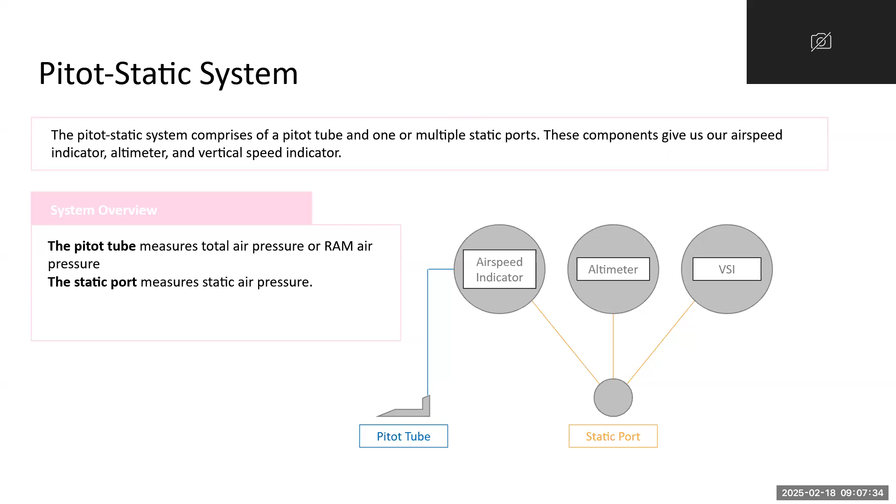Okay, cool, we'll do this after. So the pitot tube also, I forgot to mention, has a drain hole. And this just allows for air to, because it's essentially one hole, the air goes through the pitot tube and out the drain hole. Does that make sense to everybody?

Okay, cool. So the pitot tube is only connected to the airspeed indicator, but the static port is connected to all three instruments. All right, any questions so far? Everybody with me?

Cool. So the first instrument we're going to be talking about is the airspeed indicator. So like we talked about, the airspeed indicator takes information from our pitot tube and our static port. Inside the airspeed indicator, we have what's called a diaphragm.

This diaphragm, think of it like your stomach: when you breathe in air, it expands, and when you exhale, it contracts. Same thing here. The pitot tube fills the diaphragm with ram air pressure, and the static port fills the surrounding case with static air pressure. As you increase and decrease in airspeed, this diaphragm expands and contracts based on that differential pressure to give the airspeed indication.

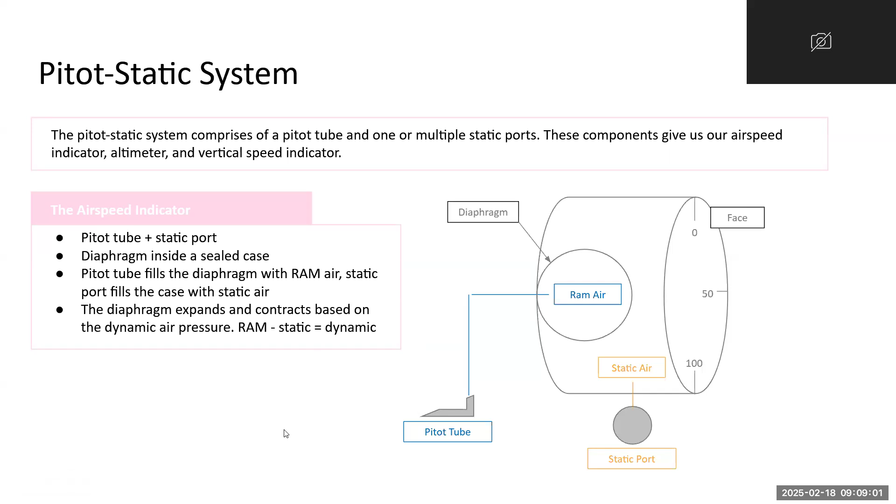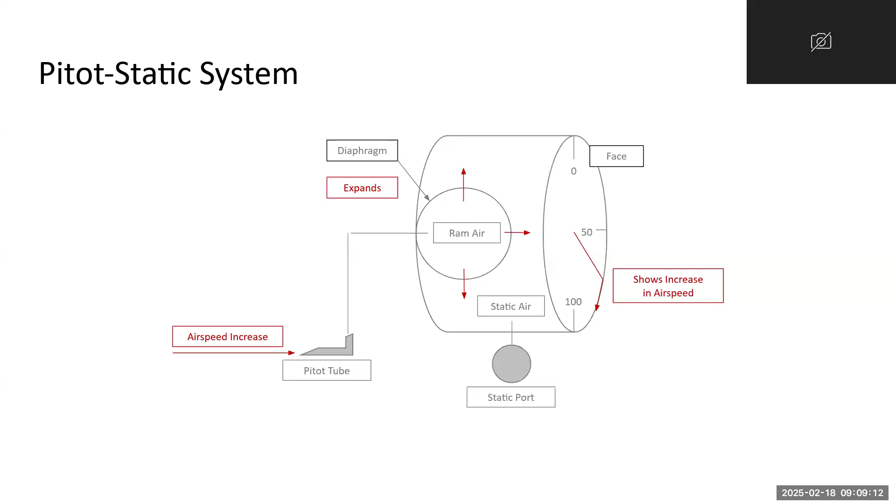So as you increase in airspeed, that diaphragm is going to expand to show an increase in airspeed on the indicator. And as you decrease in airspeed, the diaphragm is going to contract and show a decrease in airspeed indication.

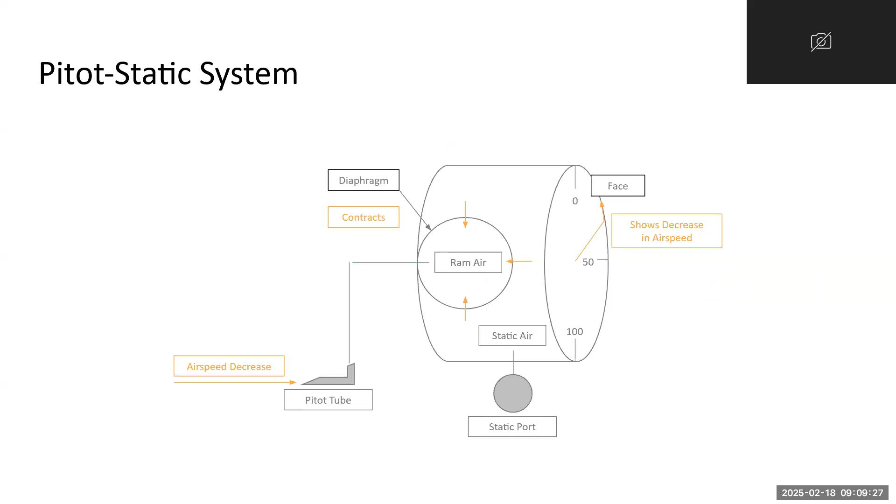Is that making sense so far, everybody? Okay, cool. We're not gonna go over that.

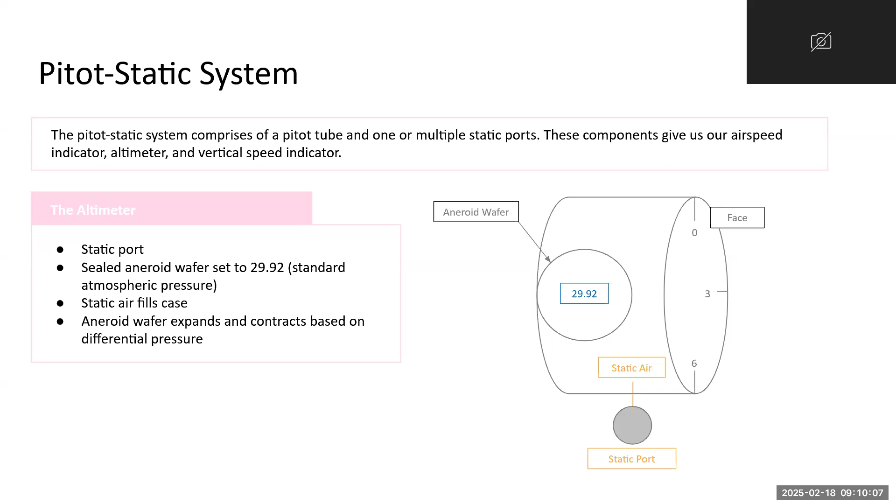So the altimeter works similarly to the airspeed indicator, but it only takes information from the static port. It has what's called a sealed aneroid wafer, which is similar to a diaphragm, but the pressure inside the aneroid wafer remains the same at 29.92. So essentially, we have the sealed aneroid wafer set to 29.92, and then the case fills with static air pressure. Same thing with the diaphragm: the aneroid wafer expands and contracts based on that differential pressure to give an altimeter reading.

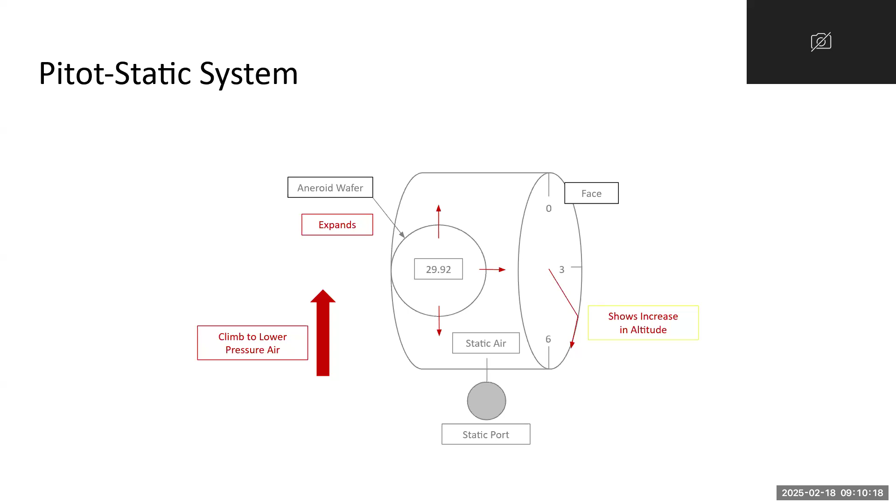When you climb to that lower pressure air, like we talked about earlier, that aneroid wafer expands to show an increase in altitude. And when you descend to that higher pressure air, that aneroid wafer contracts to show a decrease in altitude.

And finally, we have our vertical speed indicator. Our VSI only takes information from the static port. It has a diaphragm inside of a case, like the airspeed indicator. The static port is connected to both the diaphragm and the case, but the static air enters the case through a calibrated leak, meaning only a certain amount of air is let in at one time. So the pressure changes instantly inside of the diaphragm, but slowly inside of the case.

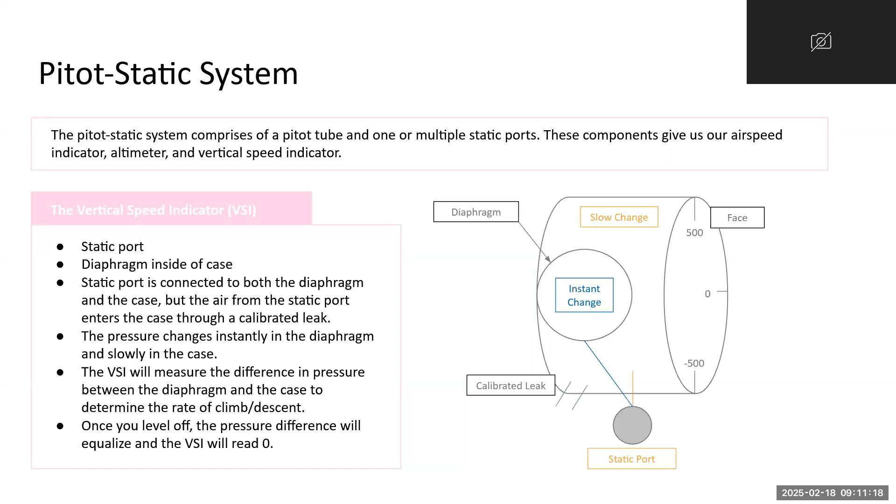Does that make sense, everybody? Okay, cool. So the VSI essentially compares the pressure inside the diaphragm that instantly changed to the pressure inside of the case that slowly changed to give that vertical speed indication.

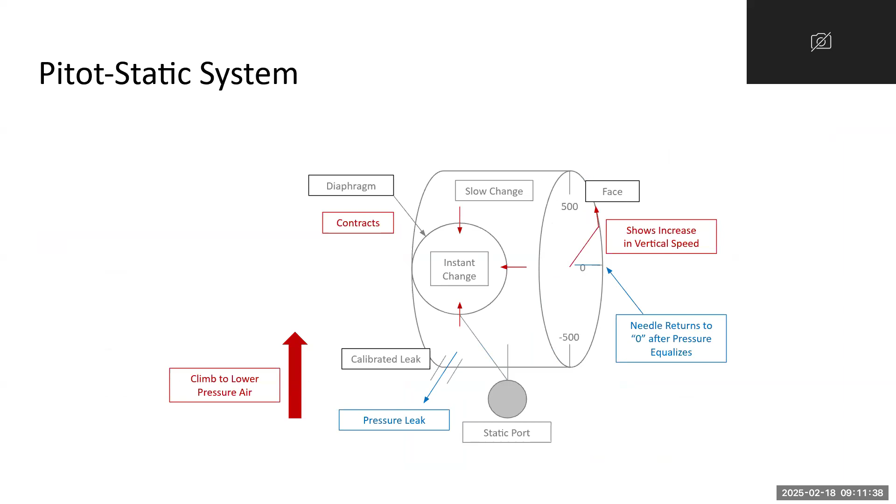As you climb to that lower pressure air, there's that instant change, which causes that contraction in the diaphragm to show an increase in vertical speed. Once the pressures equalize between the two, meaning that you're leveled off, it'll show a 0 on the vertical speed indicator. Same thing as you descend to that higher pressure air: that diaphragm will expand, showing a decrease in vertical speed or a descent, and then eventually it'll level off at 0 once you have leveled off.

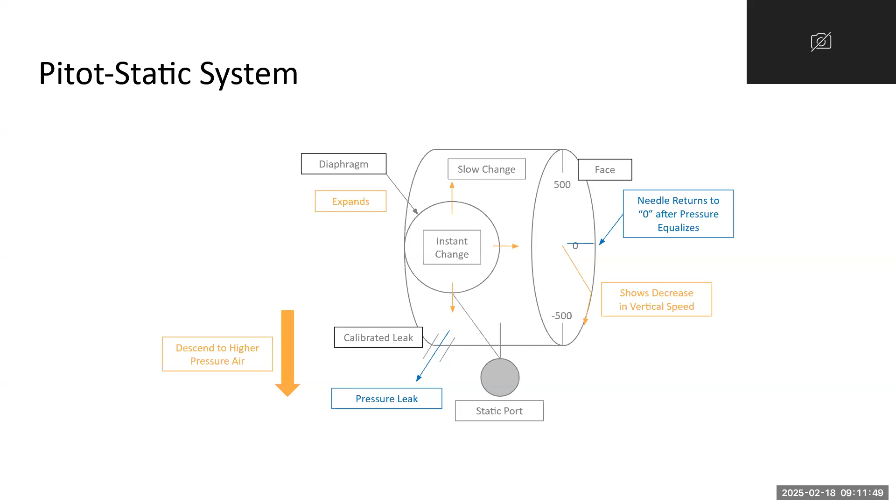Cool. Any questions on that so far? Okay, cool. So like we talked about, it's really important to understand what's going to happen if any of your systems fail in instrument, because you are only flying by your instruments, not looking outside.

So there are a few ways this can happen. When you are flying in instrument conditions, you are susceptible to icing, so this pitot tube can get clogged by icing. It can also get clogged by other things, like if a bug flies into it, or some dust clogged in there. And the static port can get blocked by other ways as well. But if the pitot tube is blocked or not working, what instrument's going to be affected? And if the static port is blocked, what's going to be affected?

Yes, exactly. Wow, you guys are a great class. That was not sarcastic, I was being for real. I think you were sarcastic. No, I was being great. You guys already know what you're talking about. Yeah, no, you guys are great. You guys are so excited. No, you guys just kind of have low energy today. I need you to match my level. Yeah. Yeah, okay, cool.

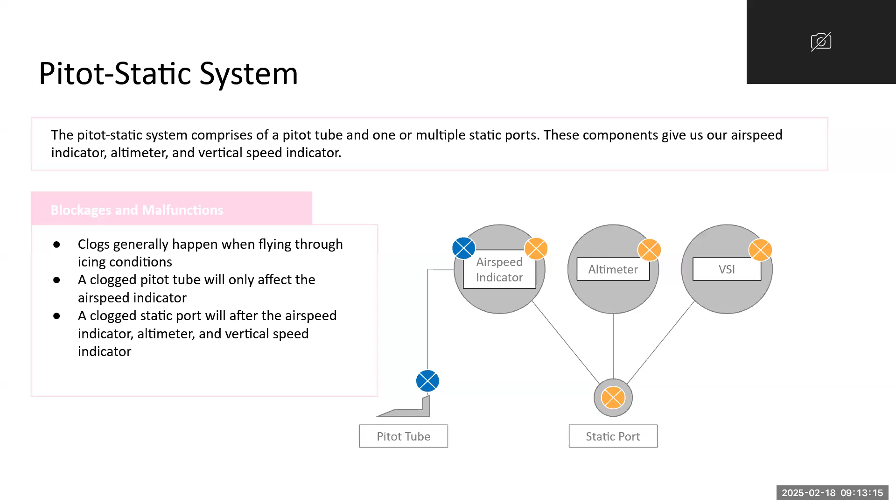So a blocked, wait. I thought a different slide, that's fine.

All right, so a blocked pitot tube, like we talked about, is only going to affect the airspeed indicator. What do we think is going to happen when the pitot tube is blocked? This means we're not getting any ram air pressure, so what's going to happen inside the instrument? It's gonna act as a... exactly, anybody know why? Because it only has static. Yes, only static air, exactly. So we're gonna have no new ram air pressure in here, only new static air pressure.

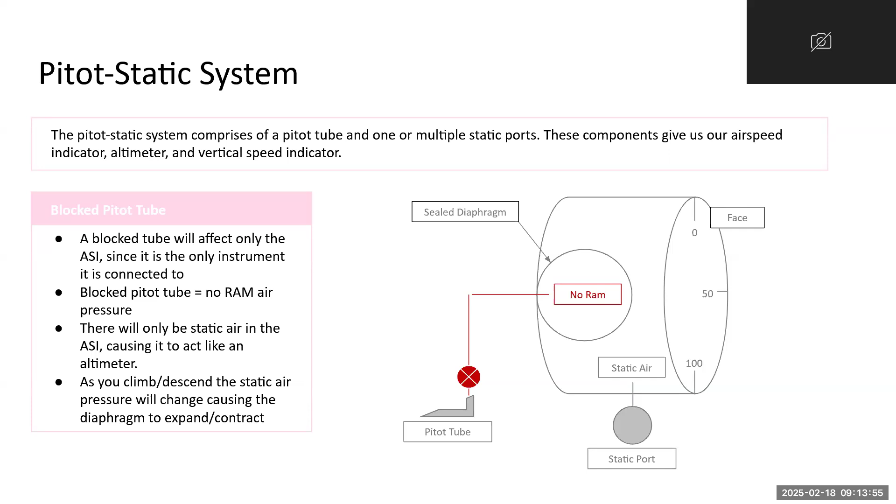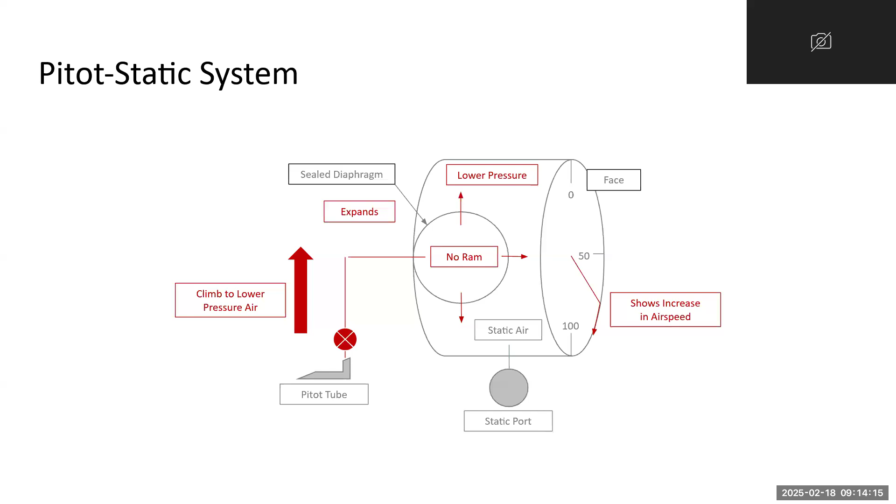So as you climb to lower pressure air, because there's no change in ram air pressure, the diaphragm is expanding and contracting incorrectly. As you increase in airspeed and climb to lower pressure air, it's gonna show that increase in airspeed. As you descend to higher pressure air, it's going to show a decrease in airspeed. So it's just going to act like an altimeter.

If the static port is blocked, what do you guys think is going to happen to the airspeed indicator? It works, but it reads inaccurately, basically completely inaccurate, because we're not getting any static pressure change. You're trapped.

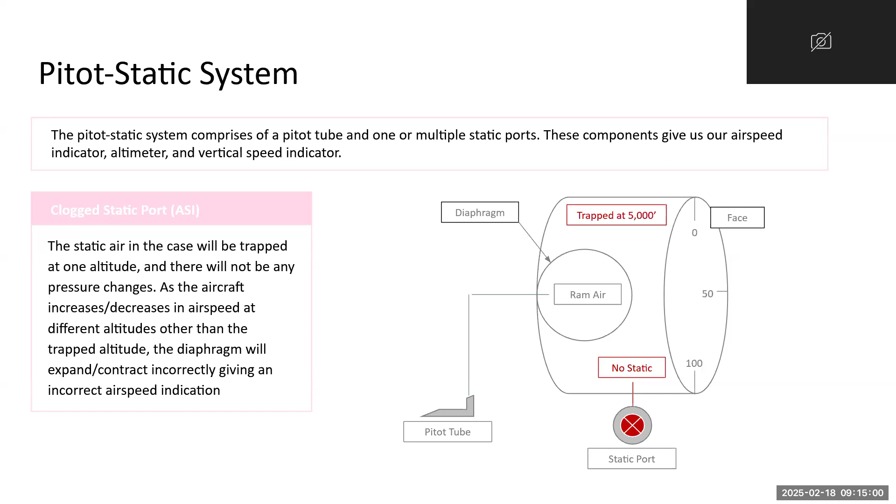The air inside the instrument is trapped at that one altitude. So like we talked about, that diaphragm is going to expand and contract incorrectly. If you climb to 6,000, that air at 6,000 is different than at 5,000, so it's just going to be incorrect. You climb to lower pressure air, the air in the static port is not the same as it was at the previous altitude, so everything's going to be incorrect.

If the static port is blocked, what do we think is gonna happen to the altimeter? It's gonna freeze on the altitude that it got clogged. Yes, exactly, because we have to remember that sealed aneroid wafer is set at 29.92. That pressure is not gonna change.

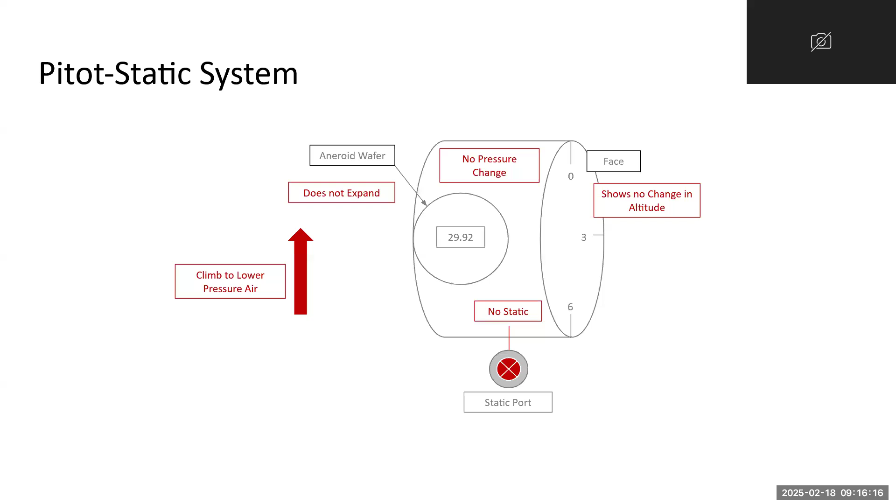The only pressure that's changing is inside of the case. So if this pressure is not gonna change, it's just gonna freeze. If we climb, there's gonna be no pressure change between the two, so it's gonna freeze. Same thing when you descend - no pressure change, it's gonna show the same. It's not gonna read 0, it's gonna freeze at the altitude it was blocked at.

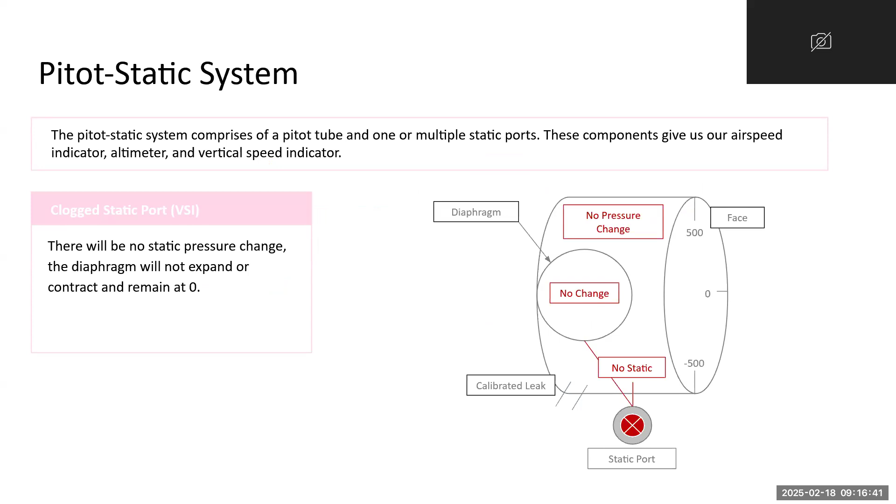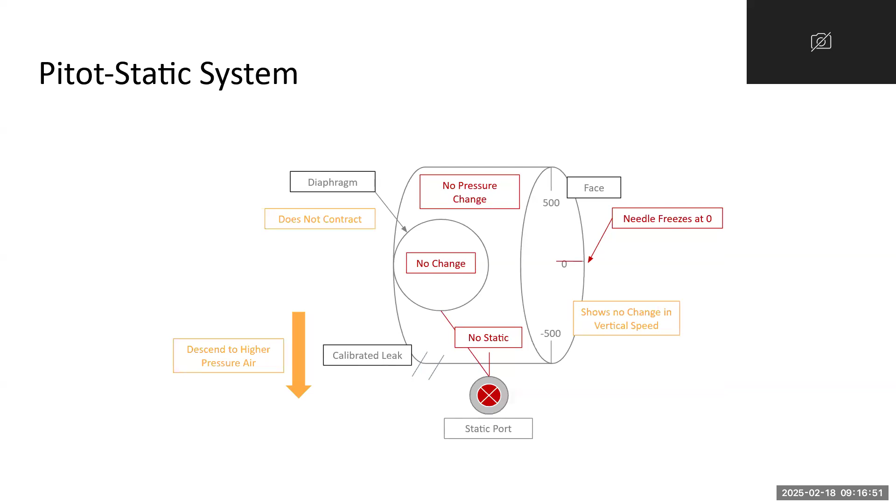So if we have a clogged static port, what do we think is gonna happen to the VSI? Same thing, because both the diaphragm and the case get their information from the static port, so nothing's gonna change inside, so it's going to read 0. Even as you climb it's gonna freeze at 0, and even as you descend it's going to freeze at 0.

So fixing the blockages, there are a couple ways we can do this. In our aircraft we have pitot heat - it's a little toggle switch right next to our autopilot function. You can turn that on, it'll melt the ice away. I've never tried it in icing, but it's gonna heat the pitot tube to hopefully melt the icing away.

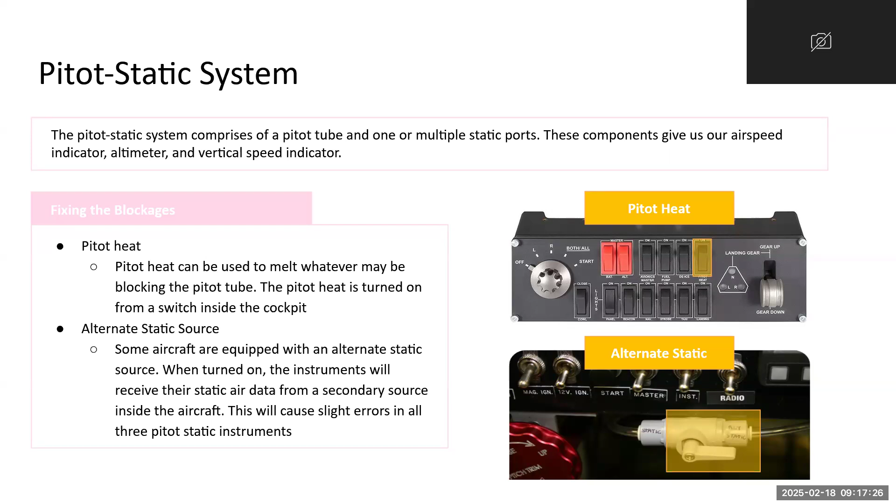Some aircraft are equipped with an alternate static source. I've been told a few slings actually have them, but it's not standard - it's better to assume we don't have an alternate static port. But if you do, I'm assuming Cessnas have an alternate static port, most of them do. If you use an alternate static source, you have to be aware there are going to be some errors because it's on the inside of the aircraft, and our aircraft are not completely airtight sealed, so it's not going to be completely static air - it's just going to be a little bit incorrect.

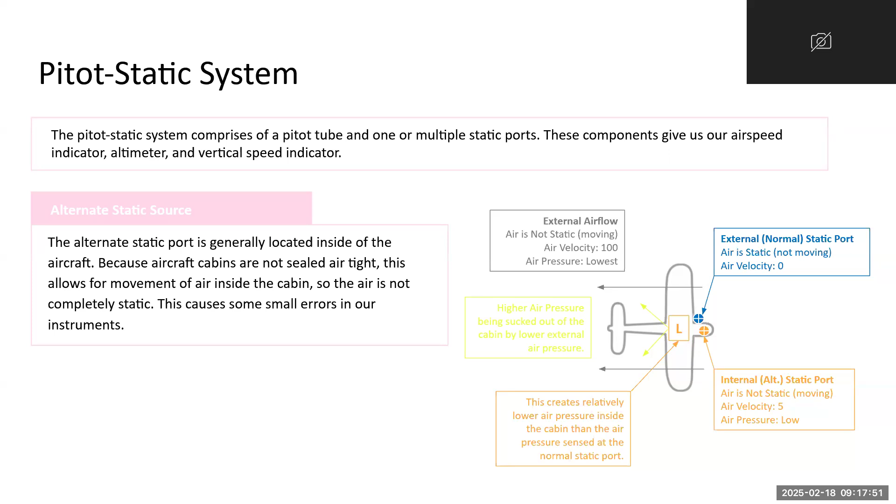So for example, the airspeed indicator is going to have a slight increase in airspeed, the altimeter is also going to have a slight increase, and the vertical speed is going to have a slight increase and then return to normal.

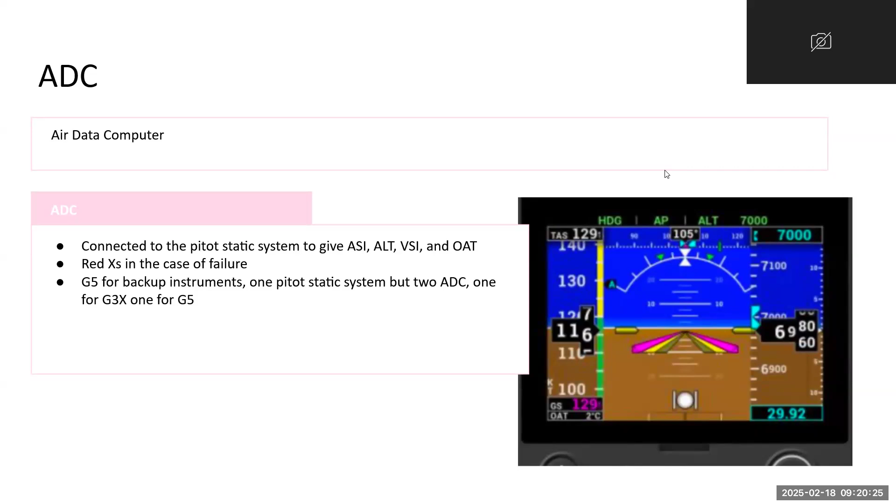Let me check and make sure that nobody's like... oh, there's nobody here anyway. Okay, cool.

Next we're gonna talk about... but sorry, the recording still gets uploaded. What? The recording still gets uploaded. Oh, I forgot, that's so true.

So next we're gonna talk about our aircraft vacuum system. Our vacuum system gives us our gyroscopic instruments. Gyroscopic instruments are our attitude indicator, our heading indicator, and our turn coordinator.

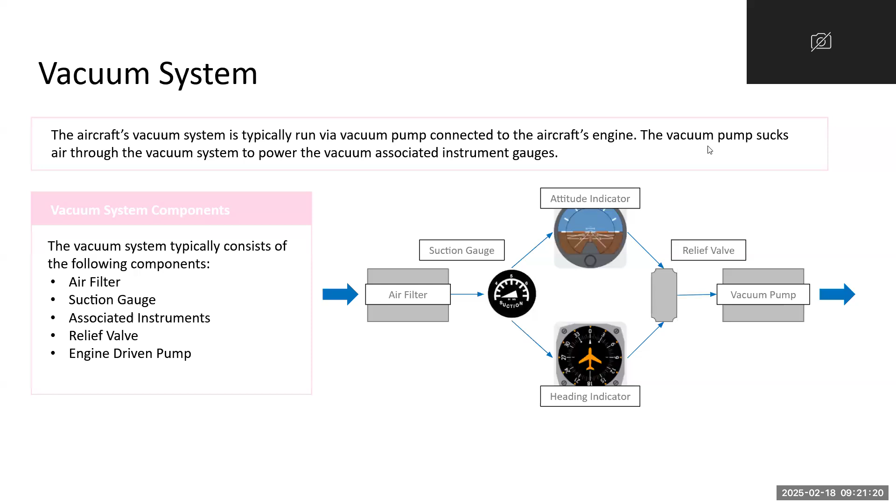So the vacuum system powers our gyroscopic instruments, and these instruments operate off of two principles. The first is rigidity in space, the principle that a gyroscope will remain in a fixed position in the plane in which it is spinning. Think of it like a bicycle wheel. A bicycle wheel spins forward like this. It will always spin on that vertical axis, even if it's turned left or right. It'll always remain spinning like that. Does that make sense to everybody?

Cool, and then we have gyroscopic precession. This one's a little more complicated. Gyroscopic precession is the idea that any force acted on a gyroscope will be exerted 90 degrees ahead of that force in the direction of rotation. So you have this gyro spinning like this, and if you apply a force to the top, gyroscopic precession says that force will be exerted 90 degrees ahead and in the direction of rotation. So if we're rotating this way, it's going to be exerted in this direction, 90 degrees ahead, like that. Does that make sense to everybody?

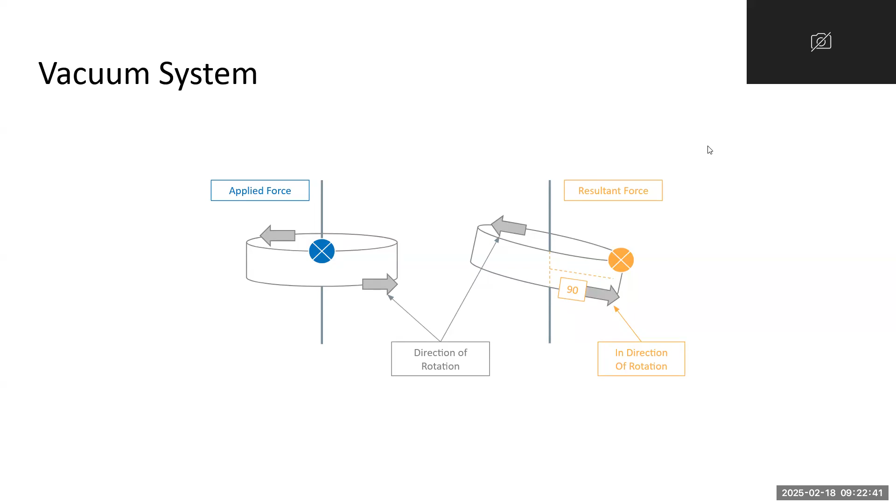Okay, cool, so those are the two principles these instruments operate off of. Our first one is the attitude indicator, which measures pitch and bank. We have this gyro right here, it spins on a horizontal plane like so. This gyro is attached to gimbals, mounted on the inside of the attitude indicator. This gimbal is also attached to the horizon reference arm, which mirrors the face of the attitude indicator. So as the aircraft banks, turns, and pitches up and down, it moves this arm, and it's also shown on the attitude indicator.

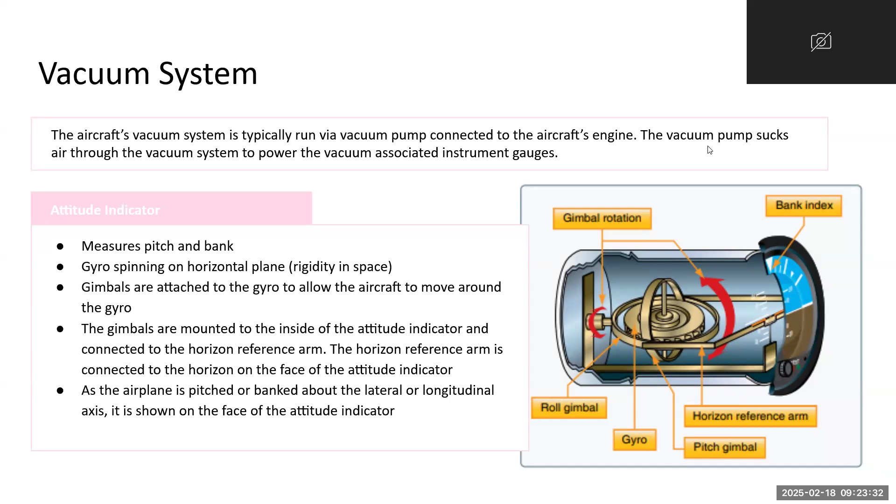Make sense? Okay, I'm just gonna bring this keyboard. So, like we talked about, you've all seen this before. We have our degrees of bank, 10, 20, 30, 60, and our degrees of pitch.

So now we have our heading indicator. Our heading indicator has a gyro inside that spins vertically. Like with the attitude indicator, there are gimbals that hold that gyro in place.

So you have to slave it to your magnetic compass every, I think it's 10 to 15 minutes. You probably have to do it. We don't have to do it in our aircraft, but in most six-pack aircraft, you would have to. Yeah, you have a knob, you push it, you're on the ground. You also want to redo it every time in the air, like every 15 minutes, I think they say. Yeah, that seems like too much work. I know, thank God for HSI.

Unless you have like the G5 in those planes, you just replace it, I guess we just use that. That sucks. So, like we talked about, this is the vacuum system.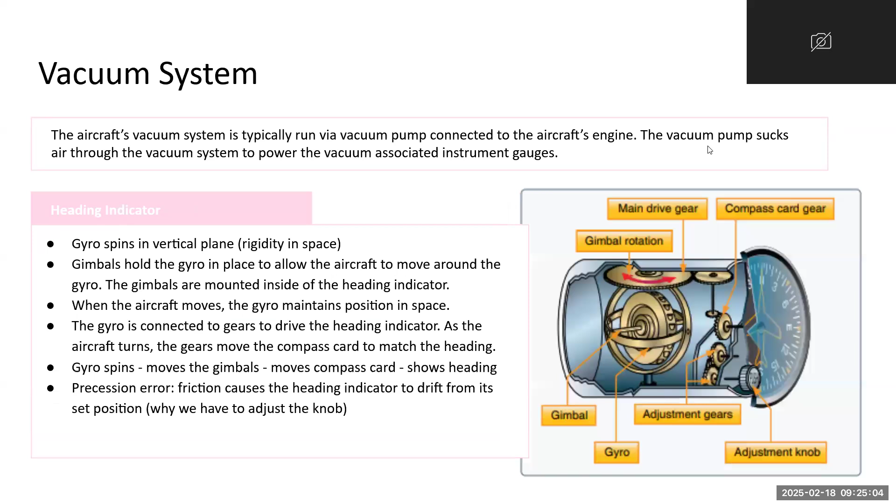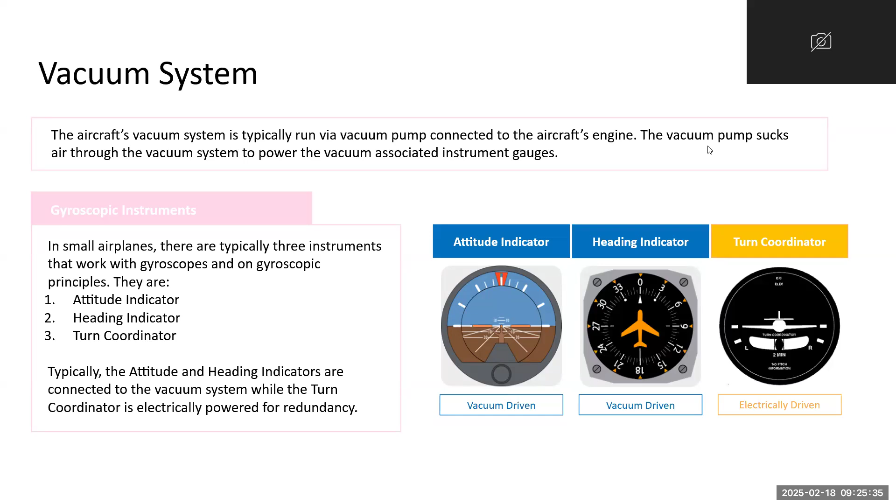These two instruments are driven by the vacuum system, but the turn coordinator and the turn and slip indicator are electrically driven. Anybody know why? For safety, for redundancy purposes, because if your vacuum system fails and all of these instruments are connected to the vacuum system, you're screwed, like, what are you gonna do? But if one of them is connected to an electric pump instead, you still have at least one instrument. So the attitude indicator and the heading indicator are vacuum driven generally, and this...

The turn and slip indicator and the turn coordinator are electrically driven. So this essentially tells us if we're making a left or right turn and the rate of turn. The gyro spins vertically like that, and gimbals are attached to that gyro and allow it to move. So as the aircraft turns and does whatever it does, that gyro will move and indicate it on the face of the indicator. We also have an inclinometer on here.

This shows us if we are coordinated in our turns, or coordinated in flight in general. So this is a curved glass tube and that ball is free to move around. Because it's curved, the lowest point is in the center. So if you're coordinated, meaning that your forces are all equal, that ball will remain in the center. But if not, you have to kick it to make it coordinated.

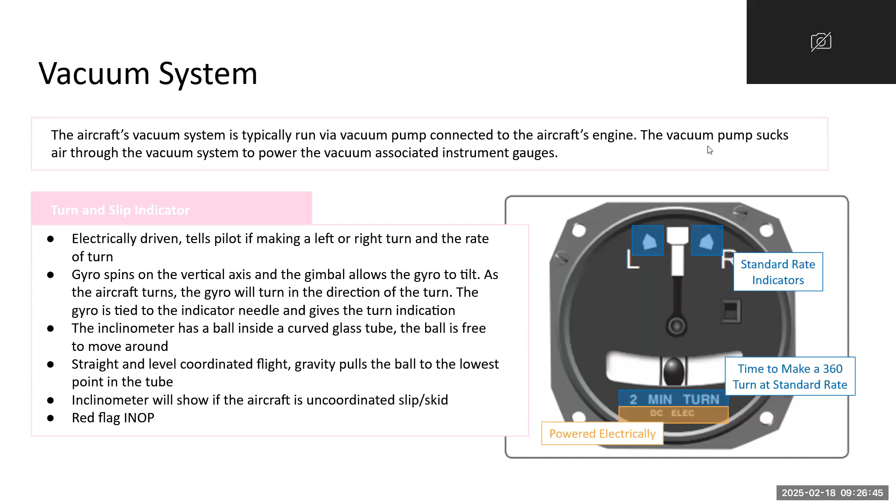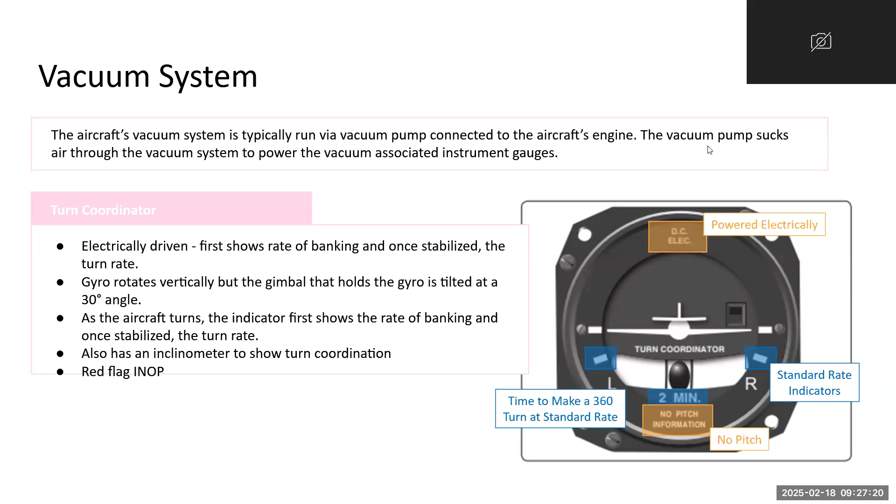And then we have our turn coordinator. Similarly, it's electrically driven. It first shows our rate of banking, and once it's stabilized, our turn rate. These two instruments are built similarly, but the gyro in the turn coordinator is mounted at a 30-degree angle. So that gyro still rotates vertically, but the gimbal that holds the gyro in place is tilted 30 degrees. As the aircraft turns, the indicator first shows the rate of banking, and once it's stabilized, the turn rate. And like the other instrument, we also have our inclinometer.

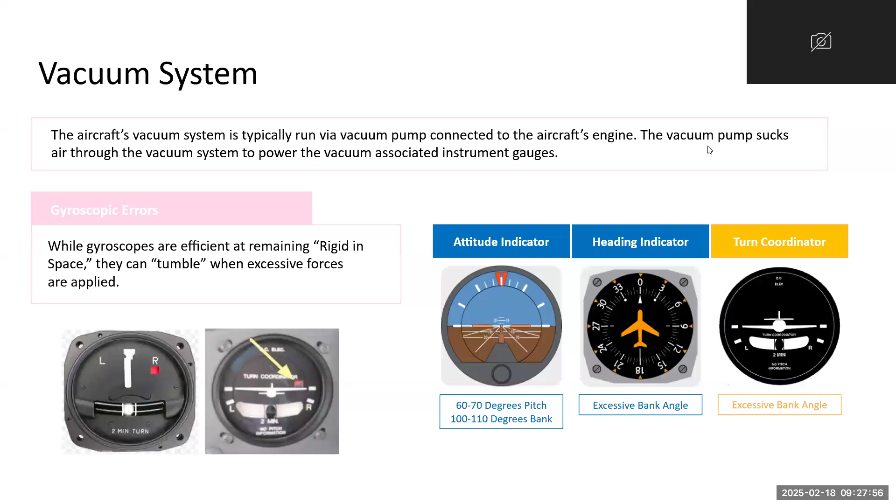Because these are gyroscopic instruments, gyroscopes are very reliable, but if you use excessive maneuvers, they can what's called tumble, and essentially the gyro tumbles out of its position. So if the attitude indicator is exceeding about 70 degrees of pitch or 110 degrees of bank, this can make it tumble. And with the heading indicator and turn coordinator, any excessive bank angle can also make it tumble. So any vacuum system failure will be shown, meaning the vacuum is not able to maintain sufficient suction, so it can't spin those gyros. Any indication that your instruments have failed will show this red little flag, just saying it's inoperative.

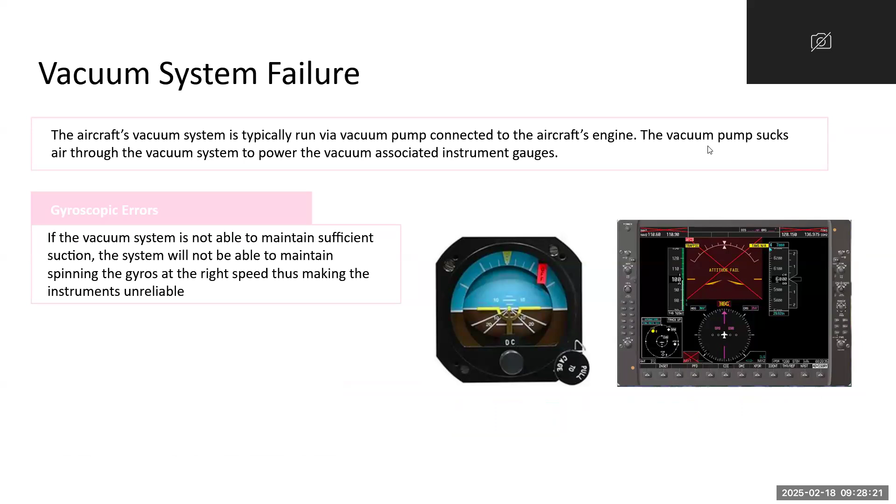But like we talked about earlier, on our instruments, it'll just be a big red X.

Instead of a heading indicator, we have what's called an HSI. HSI is horizontal situation indicator. The HSI combines the heading indicator, which is what we use to do our heading, and our course deviation indicator, our CDI. The CDI is really important in instrument training, it's what you use to correct for the course that you're tracking to a VOR, to a GPS, localizer, things like that.

So essentially, in six-pack airplanes, these would be separate — the heading indicator and the CDI would be two separate instruments. But for us, it's all one instrument on our HSI. So up here, we have our heading indication, and this is whatever we're tracking into. Let's say it's a VOR, and this is our CDI, our course deviation indicator.

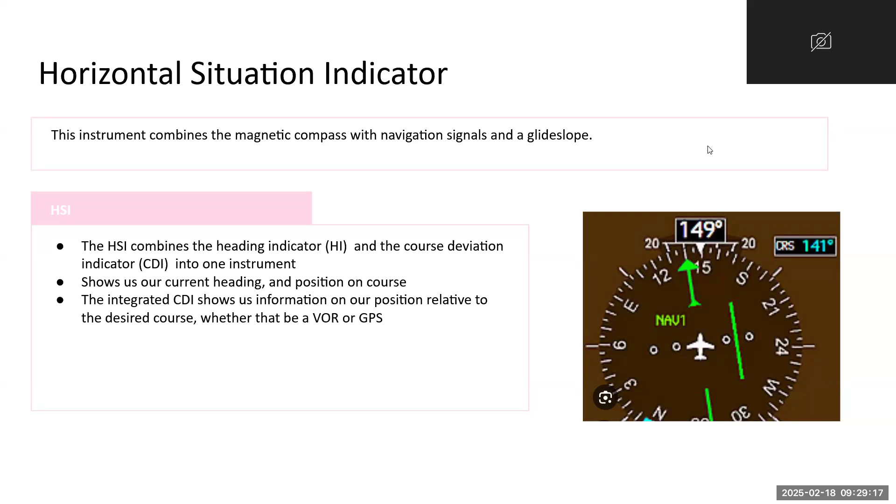Any questions on that one? No? Okay. So similarly, we do not have a standard gyroscopic system.

We have what's called an attitude heading reference system, or AHRS system. The AHRS system uses different sensors to provide our attitude, our HSI, and our rate of turn.

The first thing we have is an accelerometer. This measures aircraft acceleration rate. Then we have a magnetometer, which measures Earth's magnetic fields. So this gives us our magnetic heading, which we'll go into more later.

What's great about this is that we're not subjected to those traditional gyroscopic errors. So we don't have to reset our heading indicator every 10 to 15 minutes. We also don't have to worry about our instruments tumbling.

Like we talked about with the ADC, we have one AHRS system for our G3X, and we have one AHRS system for our G5. So in the case that this one fails, we can still use our G5 with the second AHRS system.

That makes sense. Any questions? I'm just processing. Okay, you're good. Anybody else have any questions? Anybody confused? No? Wow, you guys are really smart. Okay, it's a little confusing. Just a little bit. I don't know where I'm confused though. Is there anything that's not making sense to you?

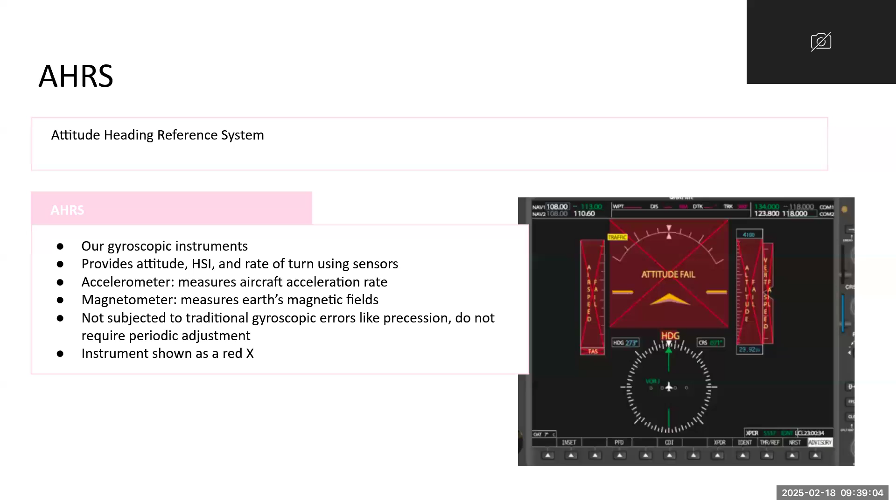We were having a discussion and John ended up asking what replaces the magnetic direction indicator for us, and that sent everyone into confusion. They didn't know the answer. Adam didn't know, he just said magnetometer. And that was right, but he did not know where in the plane it was.

Do you guys have any questions on the magnetometer situation? It's okay if you do, you can ask. No? You don't wanna talk about it? Alright, so we'll talk about magnetic compass instead.

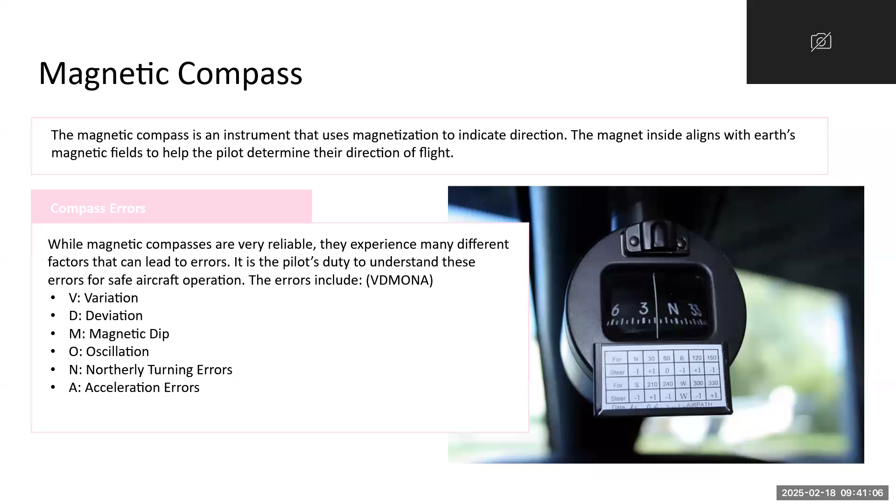So magnetic compasses are fairly reliable, kind of. They do experience many different error factors because magnets tend to do their own thing, we can't really tell them what to do. So we use the acronym VD-MONA, or DV-MONA, to remember all of our magnetic compass errors: variation, deviation, magnetic dip, oscillation, northerly turning errors, and acceleration errors.

The first one is magnetic variation, the difference between true north and magnetic north. True north is where the North Pole is located, a geographical location that never changes. But magnetic north is where Earth's magnetic field is concentrated in the north, and magnetic fields are constantly changing. So over time, magnetic north shifts farther and farther from true north.

Do you guys know what we fly in reference to on our HSI? True versus magnetic? Yeah, I think it's magnetic. Exactly, we fly in reference to magnetic north. What are our VFR sectional charts drawn in reference to? True. True, exactly. And how do we convert from true to magnetic? It is the true minus the variation.

And where do we find the variation? It shows on the map. It always changes, according to... sorry, is it 11? I think we're still 11, yeah, for flight.

I don't want to have to sign in. All right, let's just go. Yeah, that's correct.

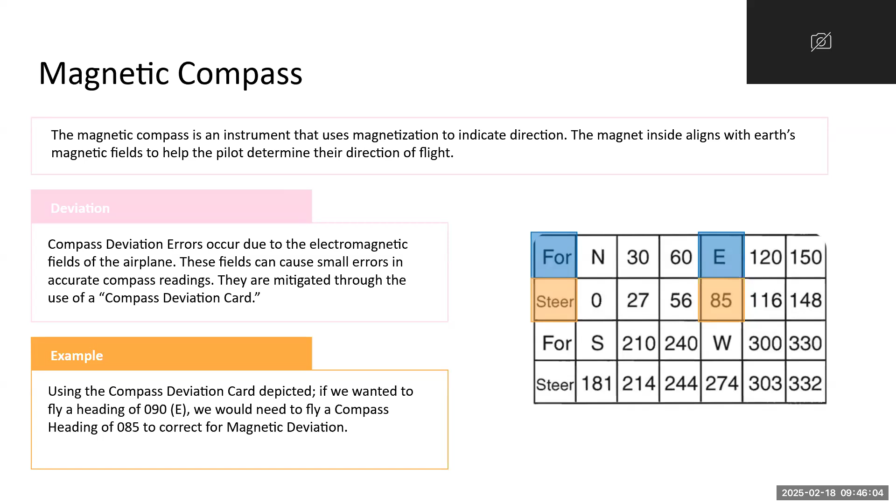An aircraft with a magnetic compass is equipped with these cards, I'm sure you two have them on your aircraft, saying that if you wanted to fly easterly, instead of flying 090, you would fly 085. Somebody goes in and puts the compass deviation card up there, so this is a really easy error to correct for, you just gotta make sure you're following it.

And then oscillation. A compass has magnets, the magnet is inside kerosene fluid and encased in a housing, and the compass card is inside as well. So if it's really turbulent or you're making excessive maneuvers, it can shake the compass card and cause it to look crazy and not give you an accurate heading. But over time, it'll return back to its actual heading, it just takes a little while.

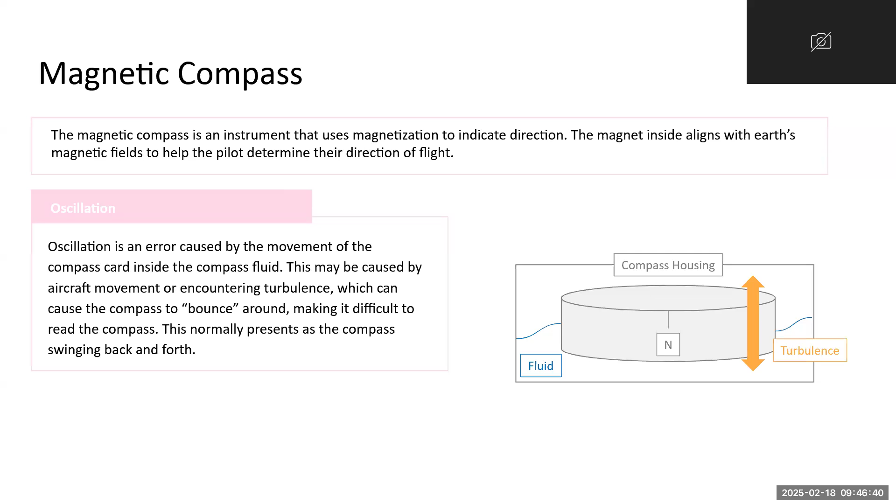And then we have magnetic dip, so like we talked about, I hate this one. This is your magnet, this is Earth's magnetic field. As it gets closer to the poles, it dips forward. Your magnet's north end is always going to want to dip towards the north pole. When you're over here, where there's no dip into the North Pole, it's straight up and down. But the closer you get to that pole, the north end of the compass wants to dip towards the North Pole. Does that make sense? And this is in the Northern Hemisphere, it's different in the Southern Hemisphere, but we're not going to talk about that.

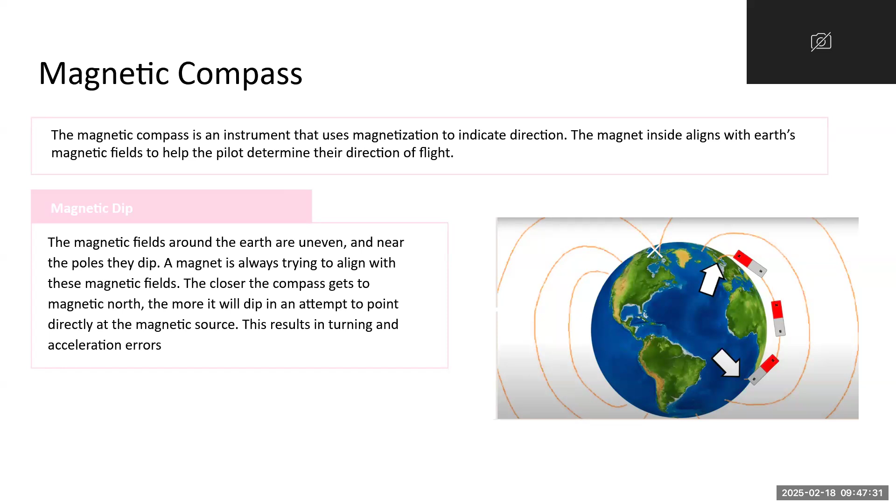So magnetic dip results in two errors: turning errors and acceleration errors. When you are turning from a northerly heading, due to magnetic dip, the north end of the compass, essentially the way you want to think about it, that north end is going to be heavier, it's trying to lead everything. So when you're turning from a northerly heading, actually, I'm going to draw this.

So this is your magnet, this top part is your north end, this magnet wants to stay on the north end. So when you're turning from a northerly heading, that magnet is right... bless you, yeah.

No, it's fine. The north end of the compass wants to stay on that north end, so when you try to turn, it's going to stay there as long as possible until it actually has to turn. That means it's going to lag.

Vice versa with the southern heading. When you're turning from a southerly heading, that north end is excited to get back to the north side, so it catches up and goes there as fast as possible. So it's going to lead.

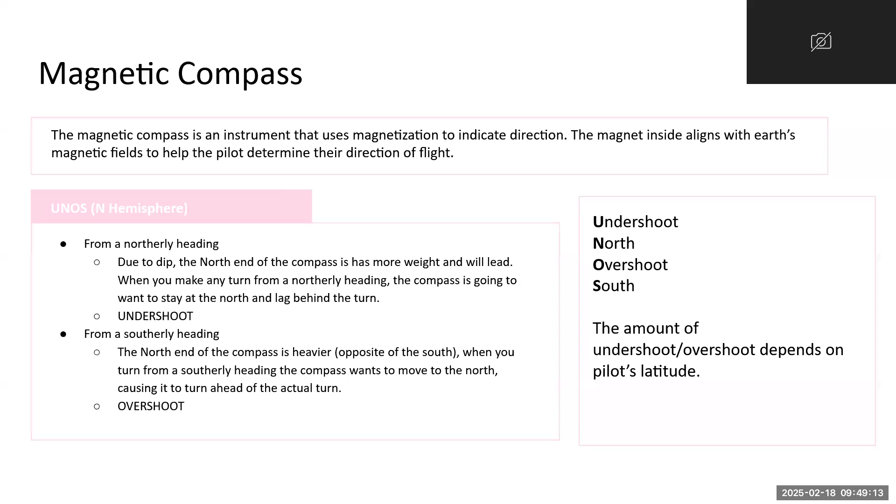I'm sure you guys have heard this acronym: undershoot north, overshoot south. When turning from a northerly heading, undershoot north. When turning to a southerly heading, overshoot it, because it's going to lead. But we don't have to do this in our aircraft.

Finally, we also have acceleration errors. This happens when an aircraft is on an east or west heading. When you accelerate on an easterly heading, the northern end of the compass is led by the north end because it's heavier, causing it to indicate a turn to the north. Vice versa, when you decelerate, that north end is still heavier, but it turns in the opposite direction and indicates a turn to the south. This only happens on east and westerly headings, not north and south.

Does this go back to the precession we apply in the magnetic compass, the 90-degree thing we just talked about? No. So why is it tilted like that in this example? Because the compass will tilt. So what you're talking about, gyroscopic precession, only applies to gyroscopic instruments. Oh. Yes, so this magnetic compass is not considered a gyroscopic instrument, it's in its own category.

Why don't they draw it the same way though? I'll call my people about that one, we'll see if they can do anything. Well, it does look similar. You're actually right, I never processed that.

Does this make sense though? Yeah, after you just explained the difference, I was like, oh yeah. There's no stupid questions, guys, because I have been where you've been. I have asked some crazy questions before. It's okay, we're not gonna talk about that one right now.

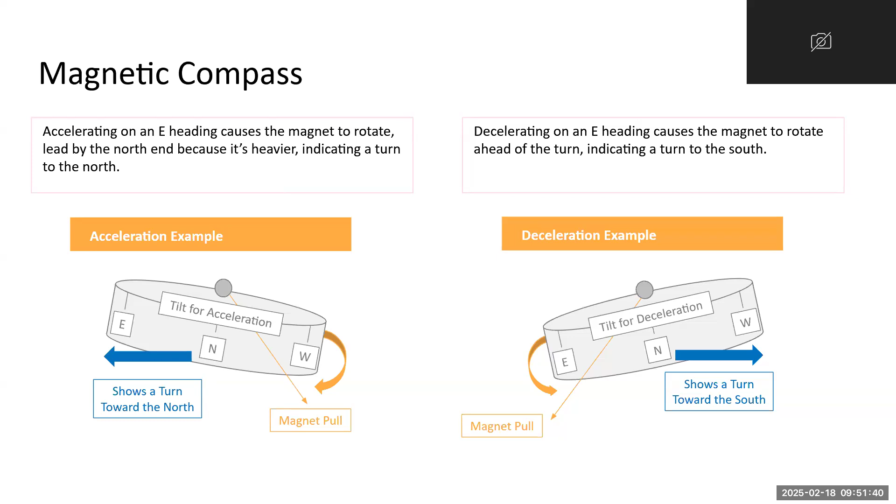That's as much as I know, low key. In my pilot training, I preferred flying recovery, it was the most fun part. Once you're in, you're gonna realize how nice it is. Have you guys flown yet? I guess not. I did discovery. Guys, go outside, get some air, this classroom is so stuffy. When I started here, every time during break we would all stand outside and vape in a circle, like 90% of our class vaped. Whoa, your microphone's still on. Oh sorry guys, I'm testing it.

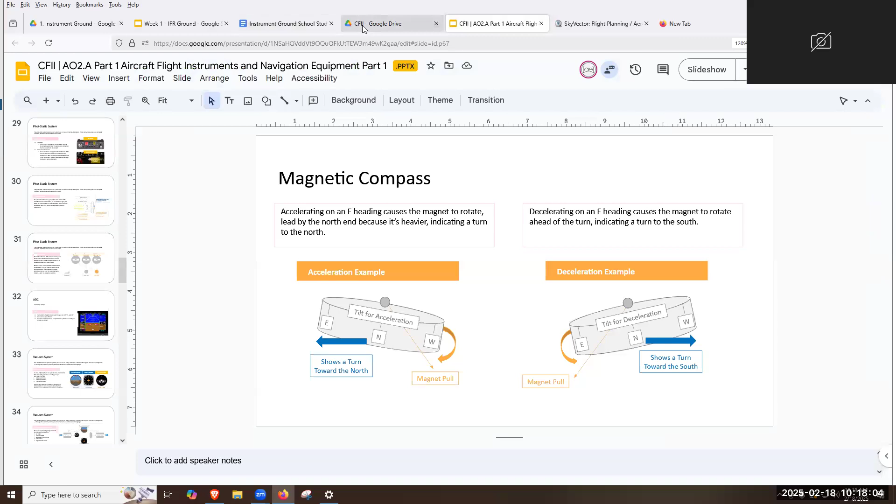But did we finish everything? No, there's so much more to go through today. No, like for today, I kind of didn't actually finish. Okay, I found my question.

Okay, what's your question? Do you want me to just read it? You need to screen share so everyone can see the picture, you can't see it otherwise. Kasha, do you know how to do that? It's connected, that's where you're at.

Let's switch, I have to switch it to AirPlay. The next step. Oh okay wait, but yeah, no keep going, sorry, this is irrelevant.

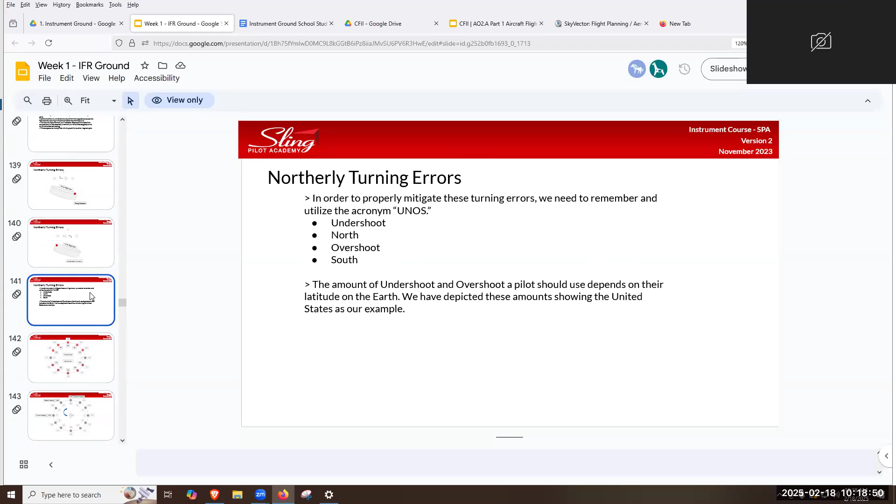Oh cool, you can do that with this, okay cool, I didn't know that, I would have done that too. But yeah, if you airplay the people on... oh no. Okay, he's signing up, everyone's right there. You sign out? Hold on, log in password.

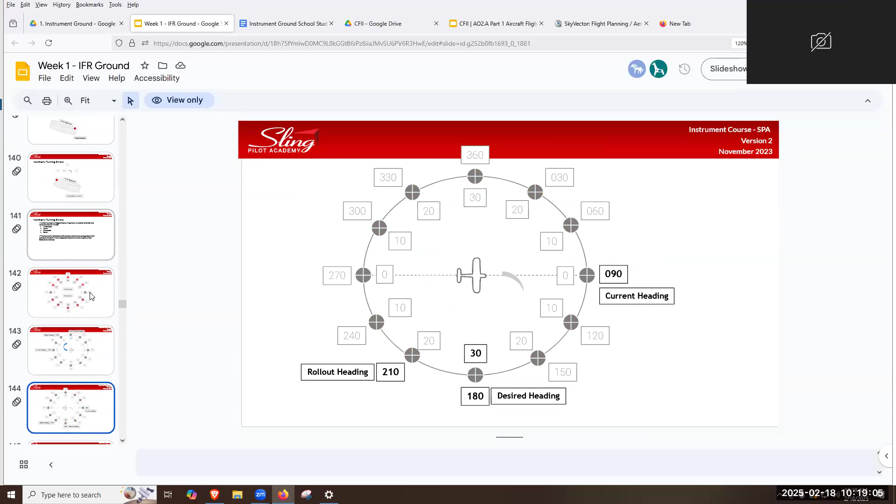We'll see the figure and we'll know. Oh, there, you didn't print the memory aid, you need to print it, that's what's gonna help you. These ones you just memorize. Here, there's a memory aid, which question did you see? Okay, so I understand you just memorize, but what happens when you're actually in the situation where you're flying?

You're not gonna use that, not that, we'll go over how to do holds. I would start it if it wasn't gonna be like a 2-hour lesson, but it's kind of like a 2-hour lesson. My advice for this one is just to memorize it.

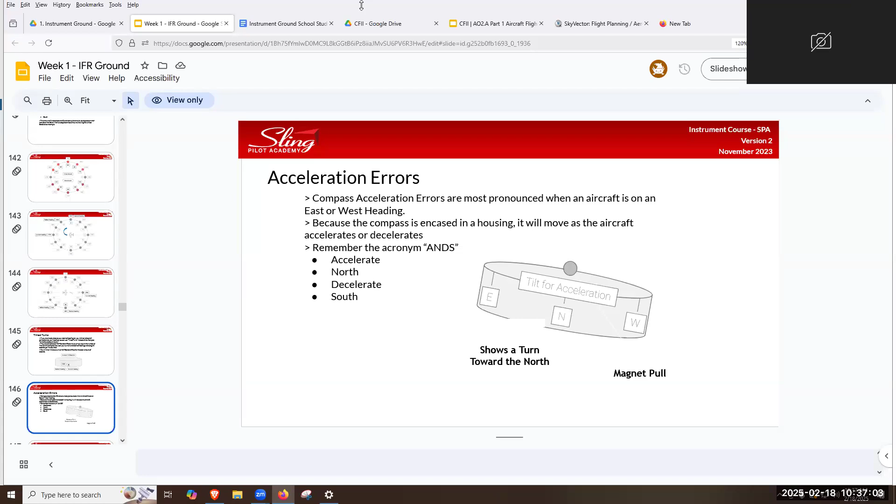So this is going to be regulation, let's see. I have a flight, so I'll head off. Oh yeah, you're good.

Okay, so this is 61.57. This is everything instrument. So in order to act as PIC under instrument flight rules, or in less than VFR conditions, within the preceding 6 calendar months, you must complete and log 6 instrument approaches, 1 holding procedure, and intercepting, inspecting, and tracking of electronic navigation.

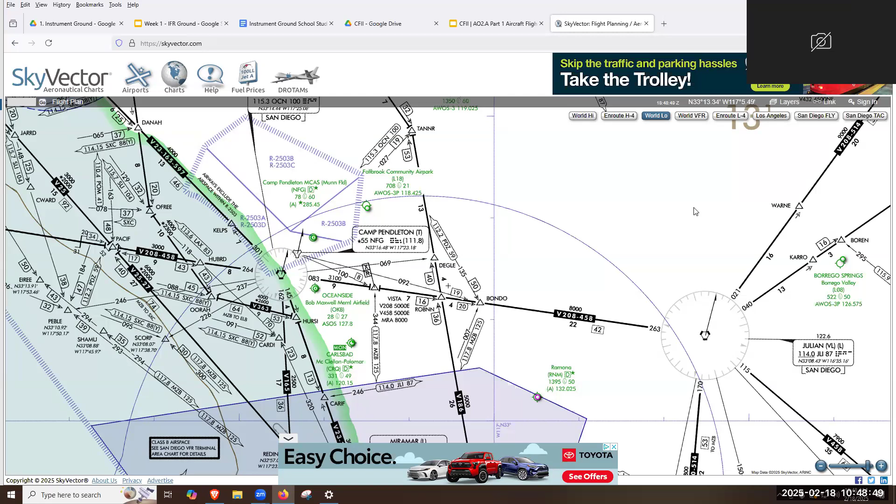If you're proficient in a Sling, can you go fly a Cessna? No, you get checked out first - don't say that to a DPE. Legally speaking, you can, you're rated to fly single engine airplanes, but I wouldn't just go do it. I would hope not, that would be silly. But if you go to a different school you have to do a checkout before you get certified. Most schools have that. If you want to take your experience in a Cessna, you need to do a checkout first. It's a good idea.

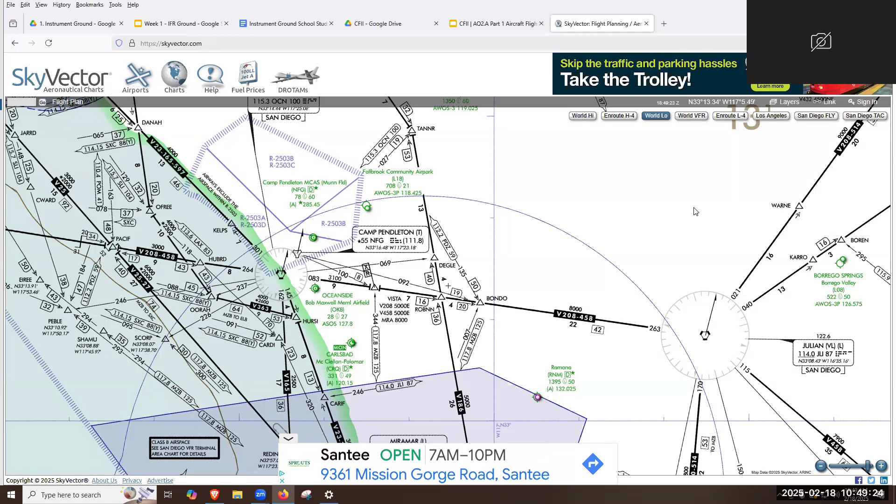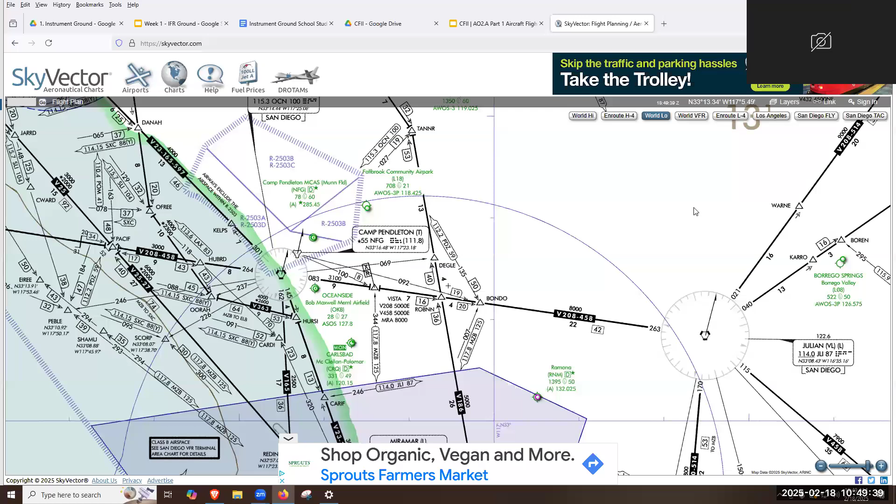Back to your question - so yes, like we said, that big one is an AATD, the small one's a BATD. You cannot use that big sim without an instructor - that's by Sling SOP, not legally required. Legally you can log it, but not by Sling SOP standards. Yes, that answers your question.

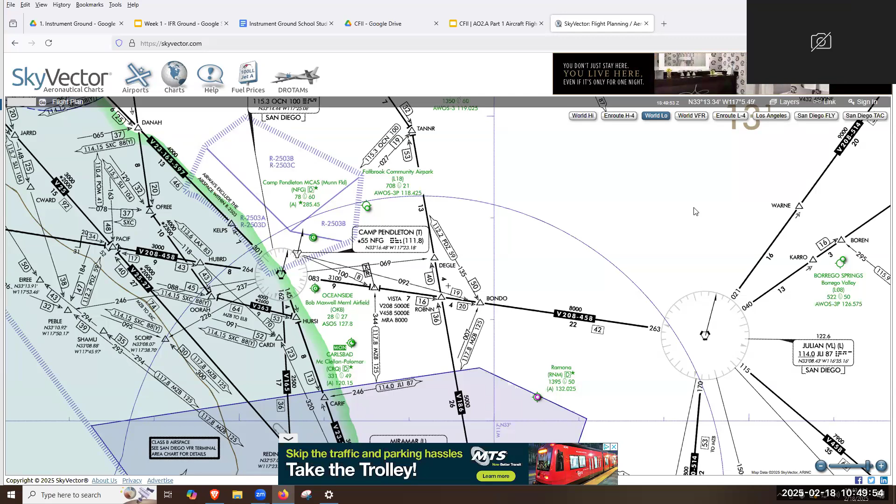Can you get current on the BATD, the baby one? You can - it's a BATD, it's the only thing you can do on it. You can get current on a BATD for instrument proficiency only, for 6 calendar months.

Can you do it for the next 6 calendar months too? Do you have to have a CFI with you, or no? You can still just do it again, if you have your instrument rating. Good to know.

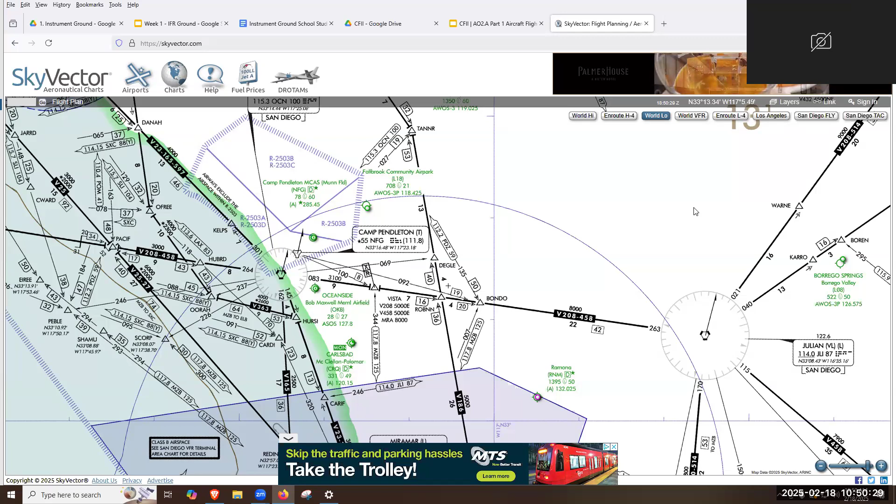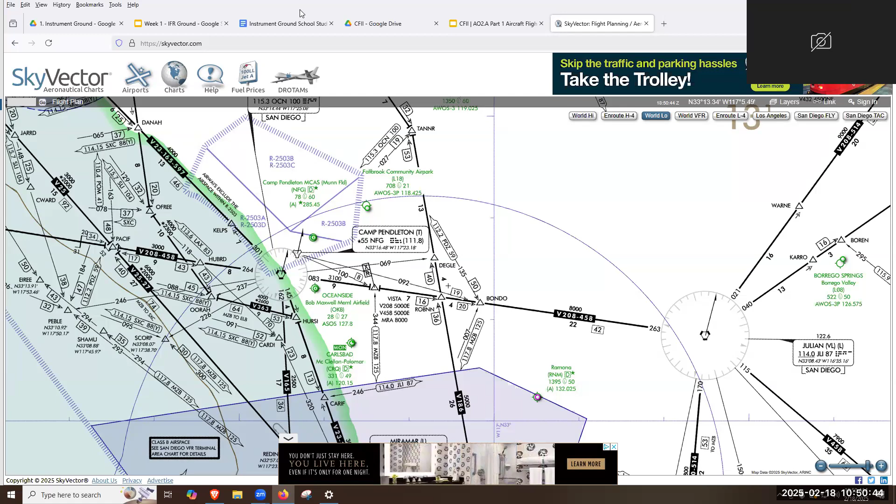Alright, does anybody have any questions about what we covered today, yesterday? No, you guys are so incredibly smart. Wow, that was not sarcastic. I'm sorry, I know that sounded sarcastic. I don't believe you.

So tomorrow we're gonna cover - oh, we kind of covered instrument failures today, but we're gonna go over that again - lost comms procedures, because it's different for IFR than it is for VFR, and ATC procedures. I'll also probably do a combination of risk management and single pilot resource management, risks and hazards in general, because being an IFR pilot has another level of risks and hazards.

So tonight, a little bit of homework - not really homework - everybody should go through Pilots Cafe and also the regulation, and just look into lost comm procedures so we can talk about it tomorrow and you guys are prepared.